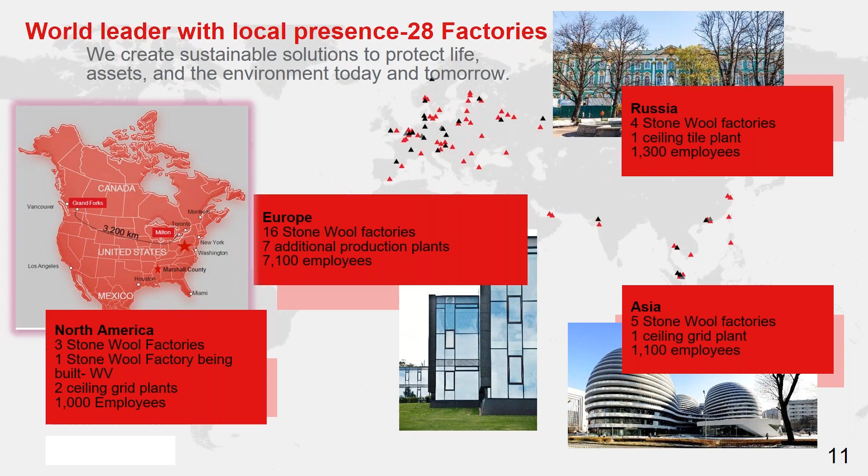So with Rockwool, we really offer total home solutions. And this, again, new construction, but I think also when you start looking at remodeling and when you start talking about vapor open products, this is where it's very important. So, for a remodel, let's say you want to go with continuous insulation on a home, and you don't know if you already have a vapor barrier on the interior.

So typically if you're in climate zones 5, 6, 7, or even 8, you might actually find that you have an interior vapor barrier, but you don't know that. So if you start putting these vapor barriers or foam insulation more than typically about 2 inches, you essentially could have a trap system. And with that, you're possibly going to increase the moisture inside of your wall cavity. So by putting a vapor open product on the exterior of a remodel, now it's still able to dry one way or the other.

So some of the other applications that we do are approved now. It's below grade, so you could actually put us underneath a slab. And then also below grade, so you could put us up against a foundation. You would still need your waterproofing. And then you could also use this as continuous insulation, and then regular batt insulation, so a replacement to like a fiberglass batt, and then also fire and sound applications.

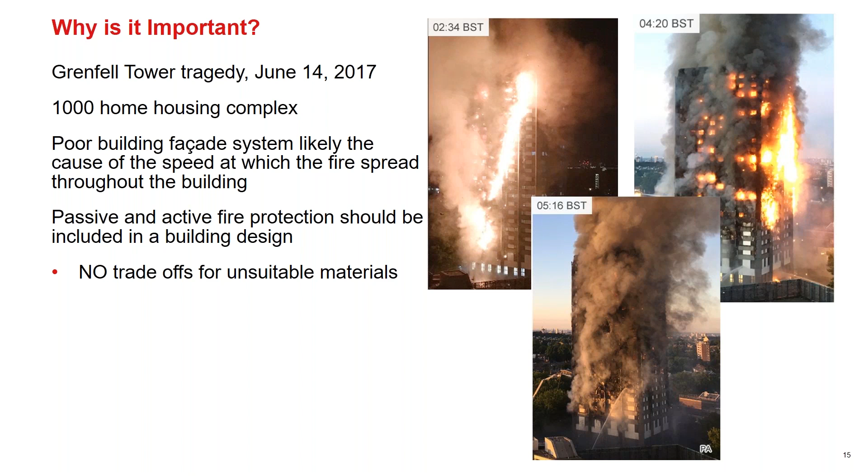And really, why is this important? We have these major tragedies that occur. You have loss of life situations, and a lot of them are actually during construction, when you have exposed flammable products. So this one was the Grenfell Tower back in 2017, and you could see just the time lapse of how quickly that fire spread. And this also really helped jolt the industry and really explain why we need NFPA 285, which I'll go into more detail on in a little bit.

But really, when you look at stone wool versus other insulation products that are currently on the market, you look at the ASTM E84 testing. ASTM E84 is a 25-foot long tunnel, and they also have a spectrophotometer which measures the density of the smoke. So in the 25-foot long tunnel, they have 25 feet worth of that insulation material. They start a fire at one end, and they see how many feet it goes to the end of the tunnel. So you could see with stone wool, the flame spread was 0, meaning that it spread 0 feet. And the smoke development was 0 as well.

Then when you start looking at some of these other materials like fiberglass, the flame spread was less than 25 feet, and the smoke development was less than 50 parts per million, I believe. Then you have cellulose, which again, less than 25 feet. So it didn't really get down to the full 25 feet after a 10-minute burn cycle. And then smoke development also is less than 50. When you start looking at a lot of these foams and plastics that aren't treated with a fire-resistant chemical, you could have flame spread that maxes out the entire test at 25, and smoke development of pretty much 450, which is going to be the highest for that test.

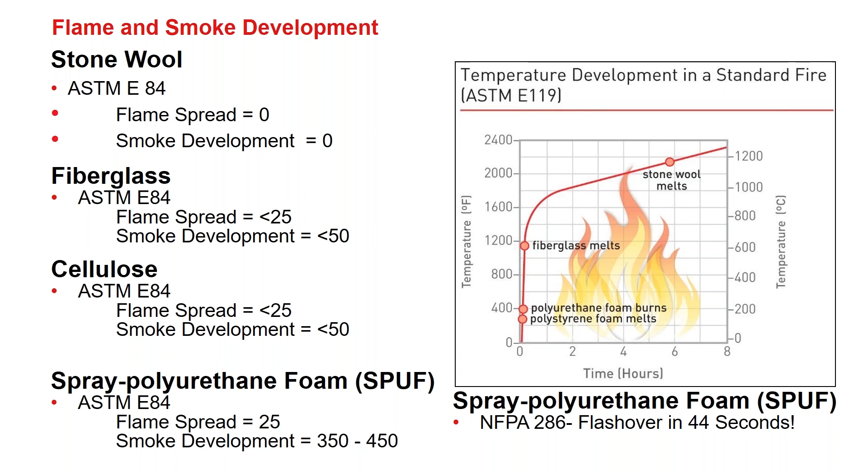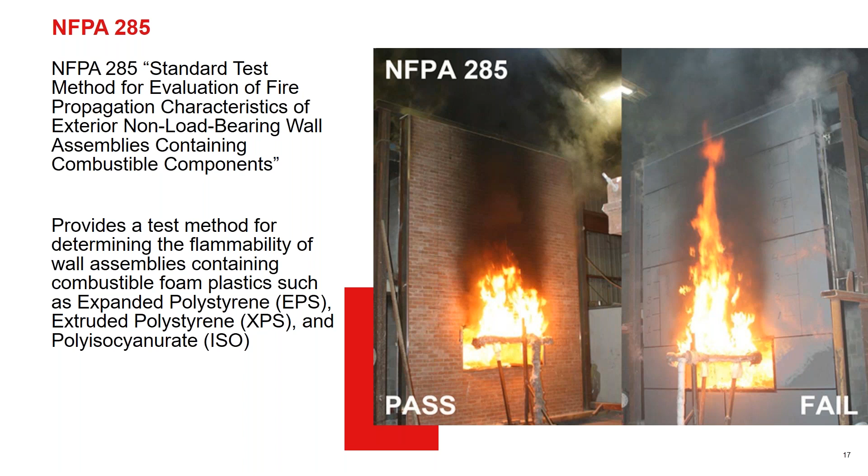So NFPA 285, and this is actually a full wall assembly. A lot of products will say by mistake that they're an approved NFPA 285 product, but really it's the entire assembly. So when you start using combustible components that are part of this assembly, this is what that test is for. What it simulates is when you have an apartment complex with a fire in one apartment, you don't want the fire to go out the window and crawl up the exterior of that building. So by using a product like stone wool, you actually don't need to do a lot of the testing that you would need to if you have combustible products.

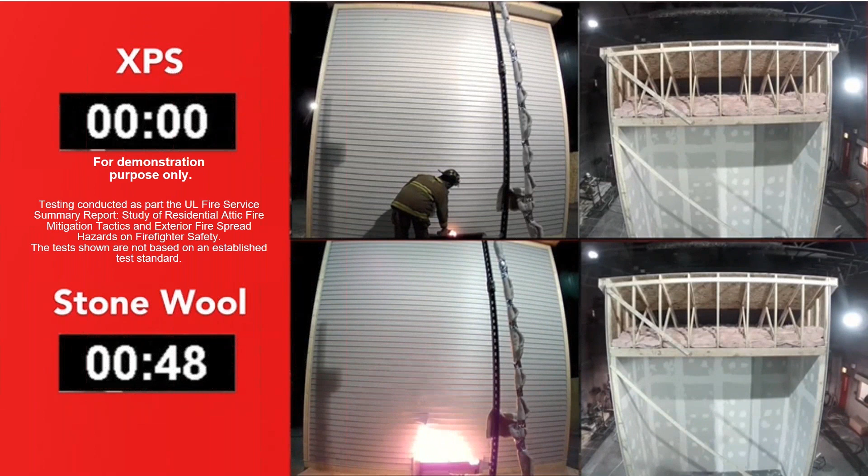When you start looking at some of these WUI areas, or wildland urban interface areas, in California, and I believe even in Utah and Texas, they have wildfire areas where now they're trying to do more non-vented attics just to prevent embers from going up into these attics. Because what's in your attic could possibly be a combustible product, and once these hot embers get into your attic, your fire begins in the attic of your home. So you can see we're at about 2 minutes and 15 seconds on the XPS.

You can see the smoke. So at this point, that's telling you that the foam itself is actually burning. Vinyl siding won't really produce too much smoke, but it's going to melt. And you can see 2 minutes, 45 seconds. Now you're starting to get a little bit of that smoke coming out of the attic. And now you're getting flashover at 3 minutes. Whereas stone wool, we go all the way up to the 30-minute mark on this test, and still it's basically contained to the grill.

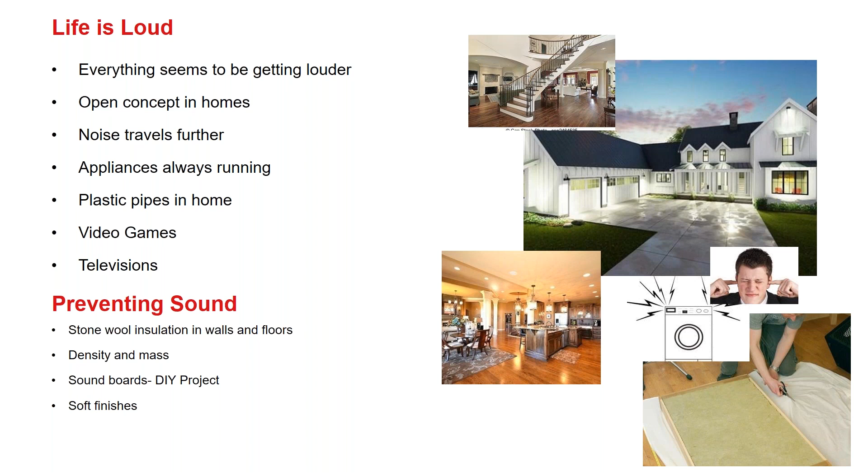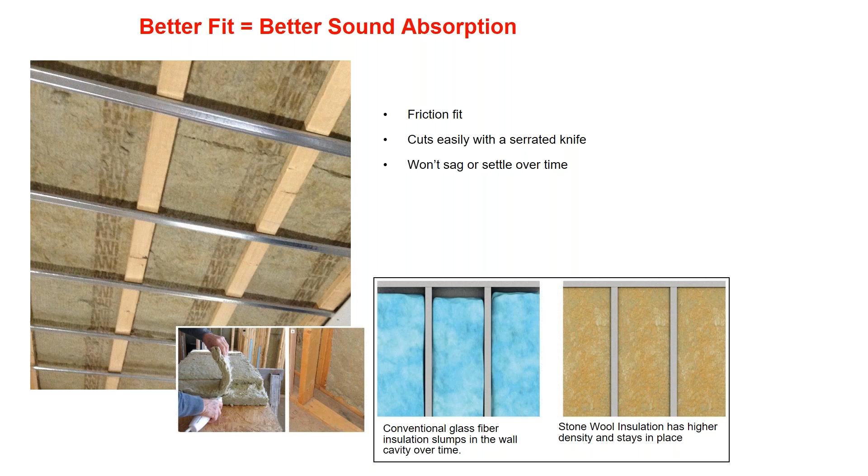So density and mass are the best for blocking sound, and that's really where the higher density of stone wool insulation comes in. But not only is it just the density and mass, but it's also how it's fitting in that wall cavity. So stone wool really does shape with a simple serrated knife, and it's very easy to mold around obstacles. Similar to thermal insulation, if you leave large gaps or if gaps appear over time, all the sound or thermal value is going to escape through those openings.

And then the next property is water repellency. And this one, I feel like a lot of people that are familiar with stone wool still don't know about this attribute of the material itself. So it is very common to think that stone wool is fibrous insulation, that it has the same properties as fiberglass. Some think that because fiberglass absorbs moisture, stone wool must absorb moisture as well, but this is actually not the case. Every fiber of stone wool from the production process is actually coated with a moisture-resistant oil, making it hydrophobic. Therefore, if water is poured on the product, it'll shed right off.

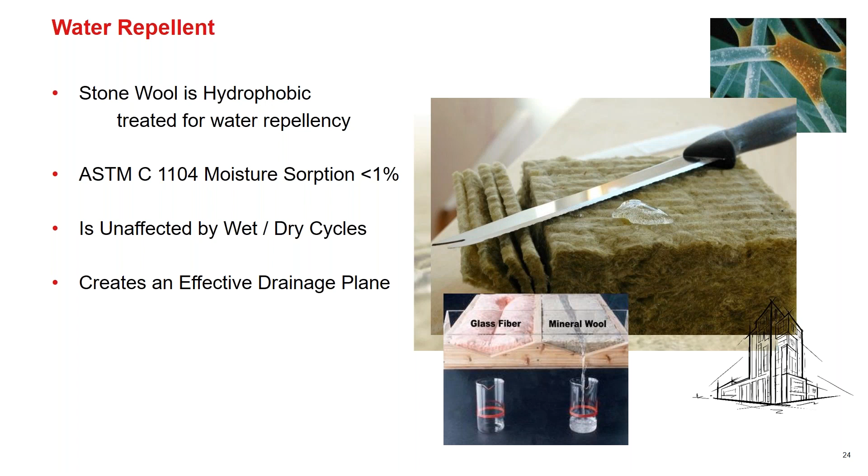It is not affected by wet or dry cycles, meaning that the product can be left exposed to moisture and it will not absorb it. You could actually see this on the lower image comparing a batt of fiberglass insulation and mineral wool insulation on the other. And because of the hydrophobic nature of stone wool products, water does not get absorbed or held by the insulation, but is allowed to run off and drain out. And that's a big part of the whole vapor open airtight concept too.

So this was a test that we did. We pretty much just took a sample of our product, held it underwater for 30 minutes. When we pulled it out, in 1 minute, it still only showed 3.69% volume in that. And then 15 minutes, 60 minutes, you could see the percentage. And then in 12 hours, it was completely dried out.

So what does this really mean in an application? I always bring up basements. If you do have like a pipe burst or a hot water heater that goes, what happens a lot of the times is you might only get 5 or 6 inches of water in your basement, but if you have a fibrous insulation in the walls, it could possibly wick up through the wall and damage more. With us, what we recommend doing is just really cutting away the drywall that got damaged, then letting our product air out. I usually say 2 to 3 days, and then just patch up the drywall. You don't need to worry about mold or mildew either.

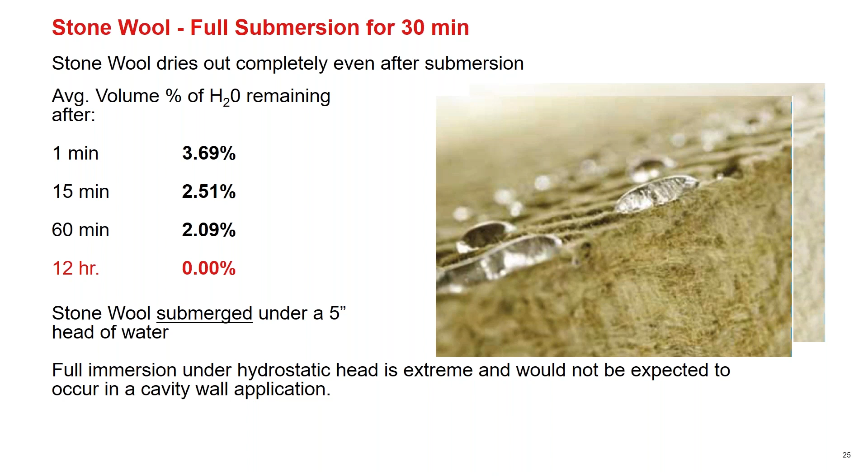And then a question that is often asked, especially when we start talking about below grade applications, when we are in contact with soil. Now, one thing about the application, when you're going below grade, I still recommend using some sort of a dimple mat to keep a lot of the water or the soil away from the stone wool insulation. But this is just a question that gets asked of us quite a bit. So really, what happens to the thermal performance of stone wool in the presence of moisture?

And we had this test done by an institute, an organization located in Germany and Boston that performs roofing analysis as well. What they did, they actually tested it, and they just basically added water until it got up to 3.1 pounds per cubic foot. We noticed that the R value actually remains pretty stable even when it's saturated. And it's also going to dry out very quickly. Typically, when you're going below grade, you're putting the stone wool in a vertical manner also. So it's going to increase the drying potential that much more. And also you have a French drain at the bottom of that assembly, so it's able to dry right out into the French drain.

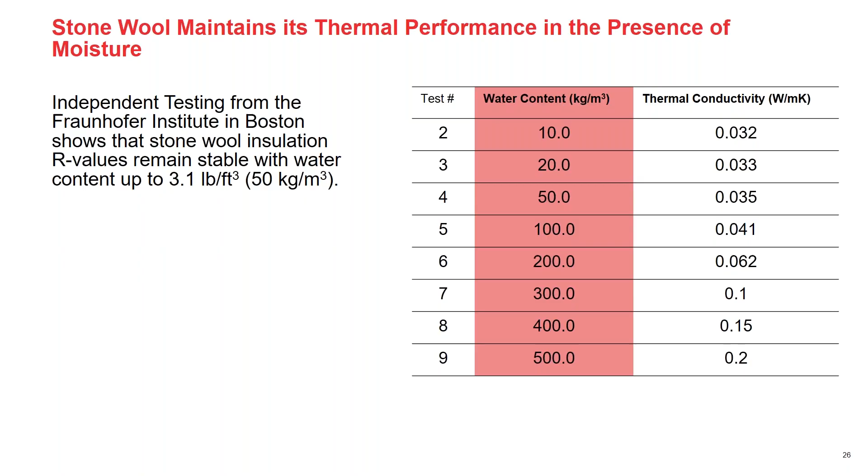And then some other added benefits, and these are the less known benefits. So really, this is more of a temperature test. They test R value at 75 degrees Fahrenheit. I don't know about you. I open up my windows when it's 75 degrees Fahrenheit, but that's just industry standard. That's what we're asked to test all of our R values at.

And if you look at the red line, that's our regular cavity wall insulation, so our batt product. And at 75 degrees, we're at 4.3 per inch. And as it gets colder, it gets up to about 4.8 per inch. So you're actually increasing R value as it gets colder. And the same holds true for our board products as well. Versus like a polyiso, and they're the biggest culprit with this. They could reduce up to 20% R value as it gets colder. So at 75 degrees Fahrenheit, they're right around a 5.7 per inch, and at 25 degrees Fahrenheit, they're around a 4.8 per inch.

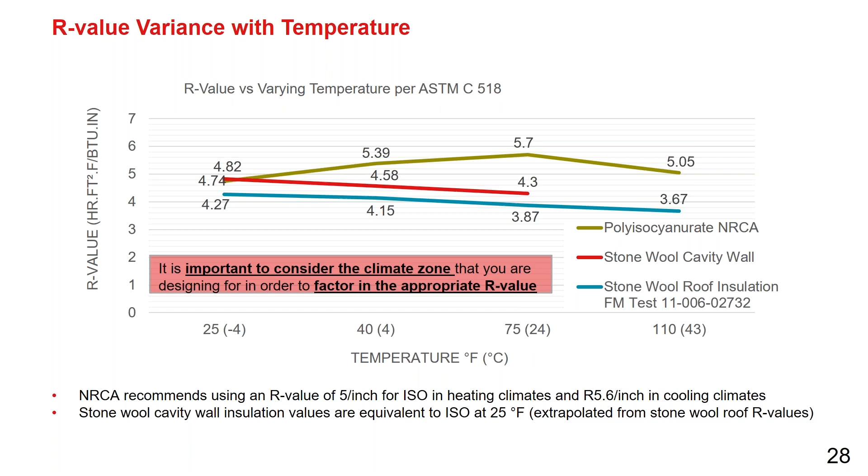And then off-gassing, and really, this is kind of a concept about, it's both for indoor air quality, but it's also going to reduce an R value. So a lot of the foams, they actually use blowing agents. And if you figure like a ping pong ball and what happens over time, those ping pong balls degrade and the blowing agent will actually be removed from that bubble. And then air just fills it in, so it reduces R value.

And these are as per manufacturer. On every one of their boards, they actually show this. So like a polyiso board starts at an R 5.6, and anywhere from your 2 to 20, just due to off-gassing, it's actually going to reduce in R value by 20%, whereas XPS is 10%. If you look at the products that aren't affected, it's really stone wool, you have EPS, you have cellulose, and you have fiberglass.

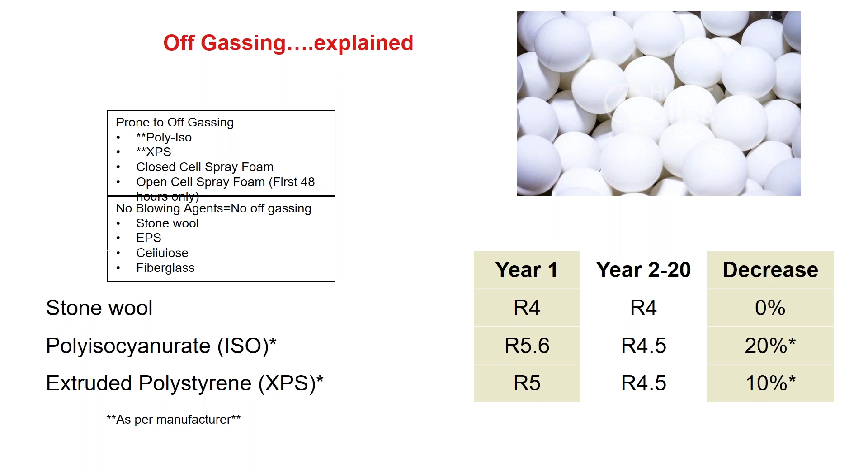And then indoor air quality. And as I mentioned before, it's a huge talking point nowadays. We're spending up to 90% of our time indoors. So the air we are breathing while in our homes is very important. We filter our air, we filter our water, or buy purified or spring water. So why are we okay with poor indoor air quality? And really, you need to start looking at all the materials that we're putting in our homes.

Down to the carpet and even the furniture. There's more and more off-gassing and other chemicals that we're really bringing into our homes. And now that we're making all these more airtight houses, we're breathing all those chemicals in. So Rockwool is Greenguard Gold certified, which is a huge deal. We will not degrade the air quality one bit. And due to the vapor open and water repellent properties, there's less chance of mold and mildew in your wall, which in turn will degrade your indoor air quality as well.

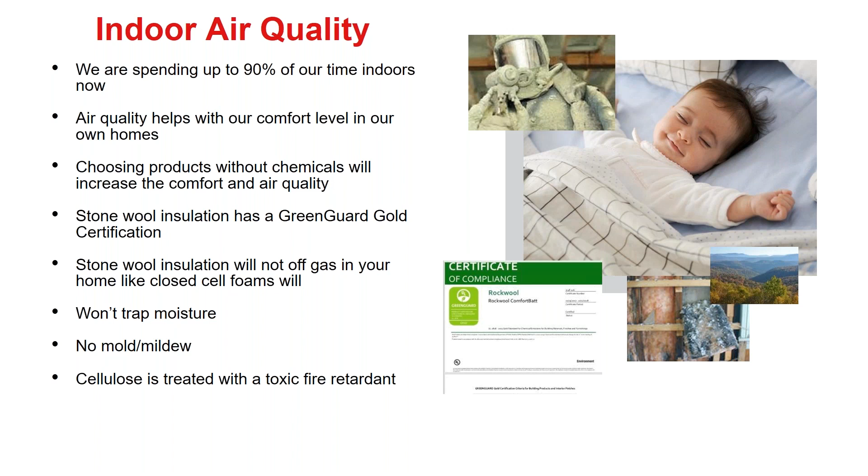And then termite resistance, and this was a test that we did not too long ago, so this is a fairly new test. We basically did this out in Hawaii with 400 Formosan termites, which are the nastiest termites that you could really find. And if you look at that weight loss column, that's the one that I really like to look at. So if you look at untreated lumber, you're looking at 51% weight loss, and I think everybody on here knows and understands that. But then treated lumber is about 4.85% weight loss, and stone wool is 4 times less than pressure treated lumber.

So when you start talking below grade applications, you don't have to worry about these termites getting into stone wool and using your exterior insulation or your continuous insulation as basically an insect superhighway up to the top of your house. And then you could look, I have some pictures of foam products too. A lot of the times, they're finding this issue in more of the climate zones, which you could see on the map. But because foam is very easy to tunnel through and it's dark, the termites really love going through it.